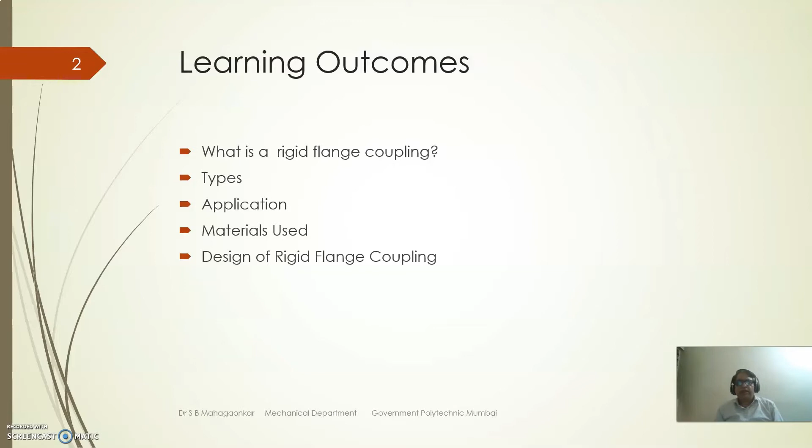The learning outcomes in this session are: first, what do you mean by rigid coupling, what are its types and applications, materials used for rigid coupling, and then the design of a rigid flange coupling.

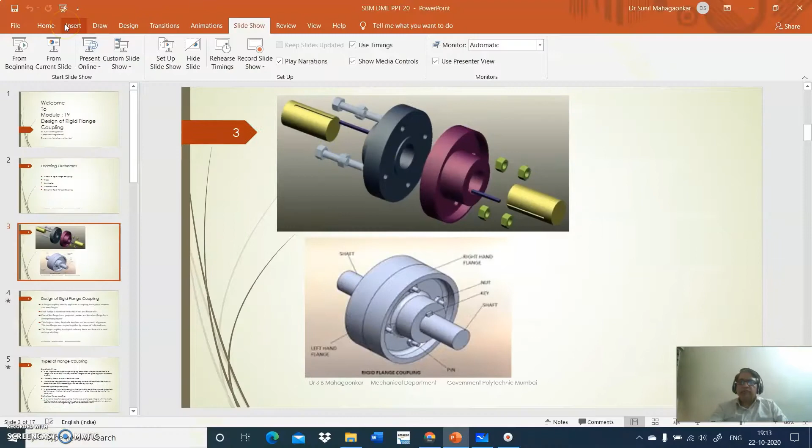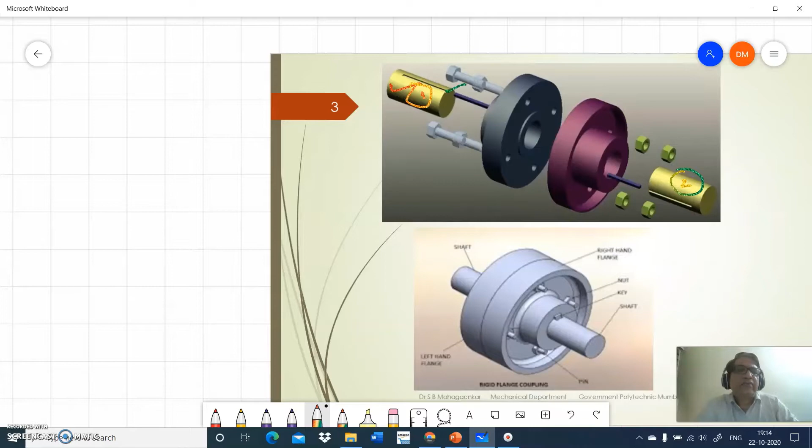The figure shown here is a protected type flange coupling. You can see it connects two shafts - this is one shaft, this is the second shaft. This shaft has got the keyway, which is at the top here. This is the keyway, and it is at an angle of 90 degrees.

If the keyway is on one shaft here, the keyway on the other shaft will be at an angle of 90 degrees. They are provided at a difference of 90 degrees for two reasons. One reason is that because of vibration, the key of one shaft may pass into the grooves of the other. The other reason is related to strength - if you provide a keyway in the shaft, it results in weakness in strength, leading to stress concentration.

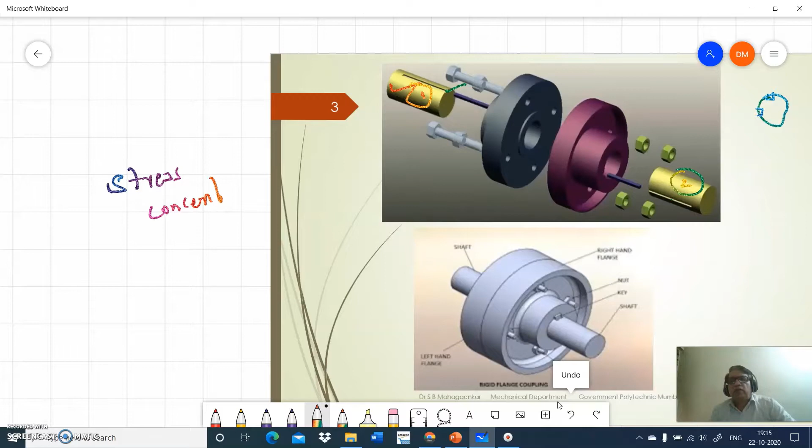If you provide some recess for the insertion of a key, the stress concentration is increased. If the length increases and it's connected in the same line, the slot will be more, causing weakness. So by taking the keyway at an angle of 90 degrees, the transmission of torque transfers from the shaft to the key, then to the left side flange, through the bolts to the right side flange, and again through the key. If the key is in the same line, it causes weakness in strength. So to reduce stress concentration and increase strength, we take a shift of 90 degrees.

So this is the flanges, and here the protection is provided. This protection is given for this flange.

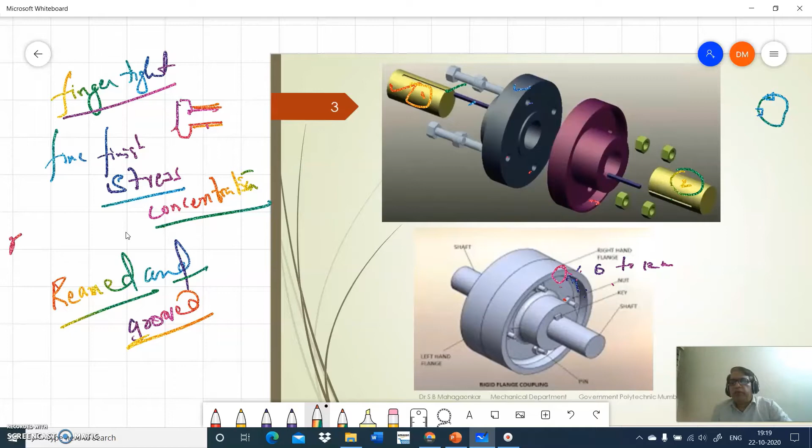then you can take the number of bolts as n, equal to whatever number you are considering, say 4. If a clearance is provided between the hole of the flange and the bolt, then we take n as the effective number, which is half of the given number. If the total number is 6 and there is a clearance, we design taking n equal to half of that, that is 3. If it is totally reamed and grooved holes, finger tight with no clearance, then we can take the number of bolts equal to the given number of bolts.

So this is the thing to apply when we are considering the number of bolts. This is a protected type flange coupling.

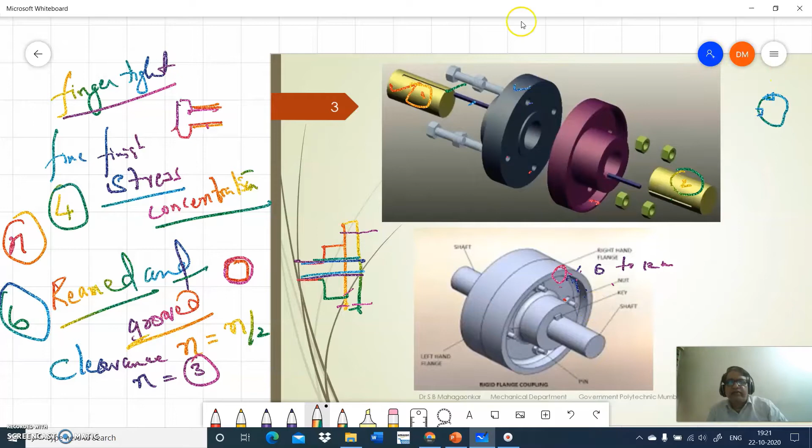In case of the unprotected type, you will simply get the two flanges, the hub portion, and the flange itself, with no protection cover. This is the shaft, it has a key, and this is the provision for the holes. So this is the left side flange, and similarly we get the right side flange. I have already shown this in another figure which I drew here.

So here you can see it. This is the left side flange, and here is the right side flange, and this is the shaft of one, this is the other shaft. This is the key. As I said, they are at an angle of 90 degrees. Why are the keys at an angle of 90 degrees? In order to accommodate the weakness in strength caused by the recess where the keyways are, so to strengthen that, we take them at an angle of 90 degrees.

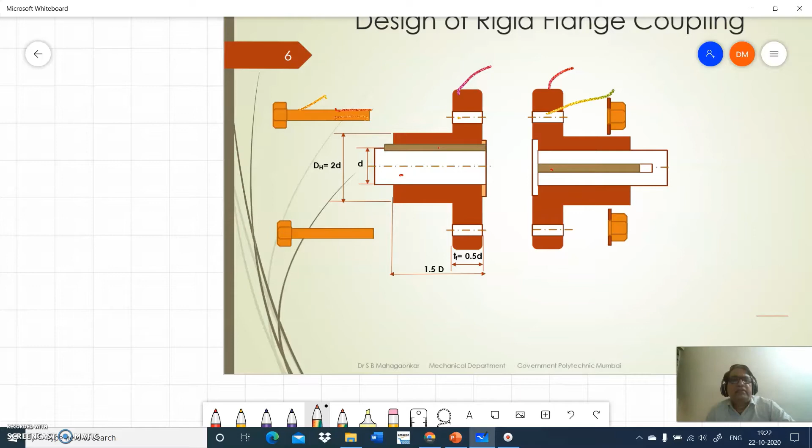These bolts have a threaded portion. Here is the threaded portion, and this is the shank portion. It goes through here, and there are no threads inside this hole. We have not provided any threads in the hole, there are no tapped holes. We have threads only on the external part.

This is a nut, you can fix it on this one. So here you will not get any movement. This bolt is totally fixed into this, and you will not get any movement between the bolt and the hole. That's why the stress which occurs here is called crushing, because the bolt is a different material and the flange is a different material.

Flange is usually made up of cast iron, and the bolt is made up of mild steel. Using this, we can get the crushing stress. You will get two different parts, which are joined with no relative movement, and that's why it's called a crushing failure. The area can be calculated from this.

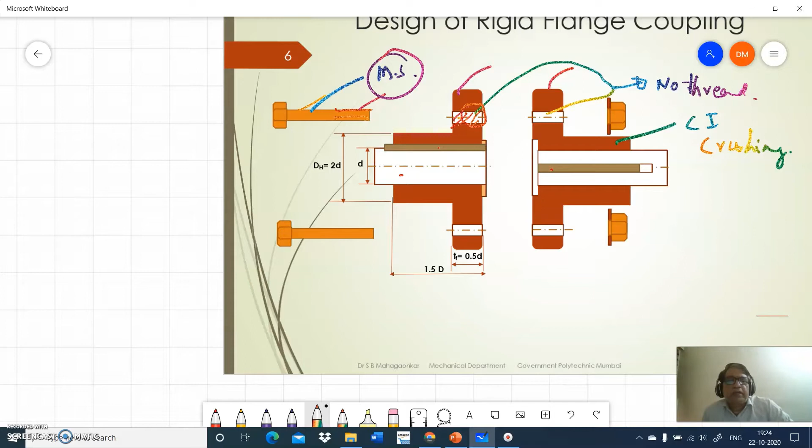While designing that, I will tell you these things. The other important part I've shown is called the spine. There is a protrusion part on the left side, like a portion that will be there, some protrusion in the... this part is the protrusion part, and this is the axis.

This is an isometric drawing, I'm drawing it so you should understand this one. This is the flange. And here the projection part is there, around 3 to 4 millimeter. This will be around 3 to 4 millimeter. If it is an unprotected type, this will be the flange, this is the flange thickness, and here you will get the holes.

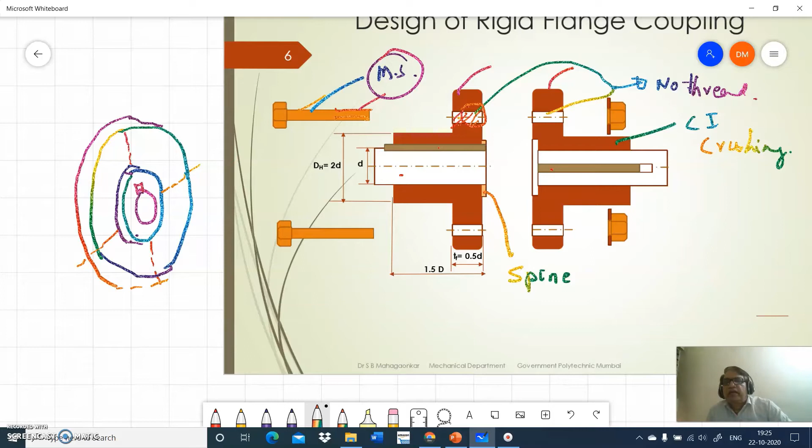If four pins are there, in that case we get this hub portion. So that will be there. This part is going to fit into this part. This is called a recess. So this spine comes in contact with this one.

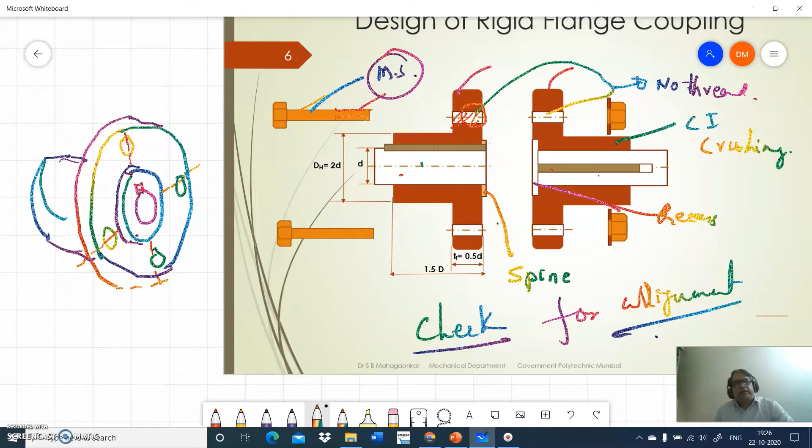So when you fix these two things, if I take one shaft over here and the other shaft over here, I can say that they are in line with each other. So we can say the alignment is proper. This is one type of check we provide for alignment, because that is very important in rigid flange coupling. In the flexible coupling, there is flexibility we are providing. This is what we are taking in the rigid coupling.

Once again, we will go over this. A rigid flange coupling usually applies where a coupling has two separate cast iron flanges. Each flange is mounted and keyed on it. One flange has a protruded portion and the other flange has a corresponding recess. This helps to bring the shaft in line and maintain alignment. The two flanges are coupled together by means of bolt and nut. The flange coupling is adopted for heavy loads and hence it is used on large shaftings.

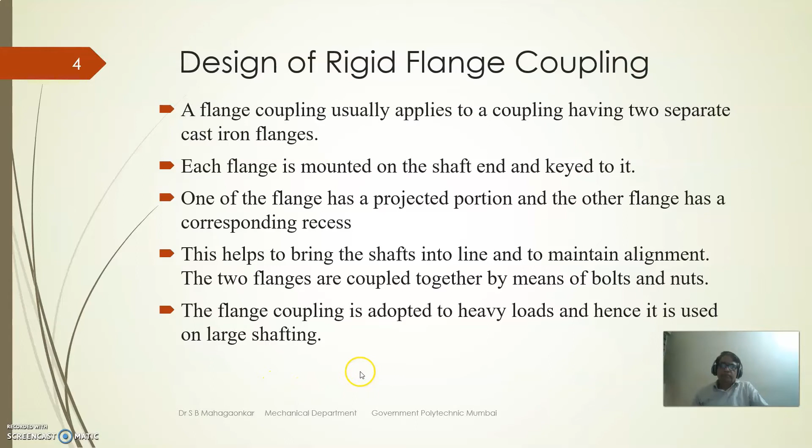There are types of flange coupling: unprotected type and protected type. In an unprotected type flange coupling, each shaft is keyed onto the boss of the flange with a countersunk key, and the flanges are coupled together by means of bolts. Generally three, four, or six bolts are used. If the diameter is less than 40, we take three; between 40 to 50, around four; and more than 50 or 60, six bolts are considered.

The keys are staggered at right angles along the circumference of the shaft in order to divide the weakening effect caused by the keyway. The left side shaft and the right side flange shaft are separated at a right angle. This is provided along the circumference of the shaft in order to divide the weakening effect caused by the keyway.

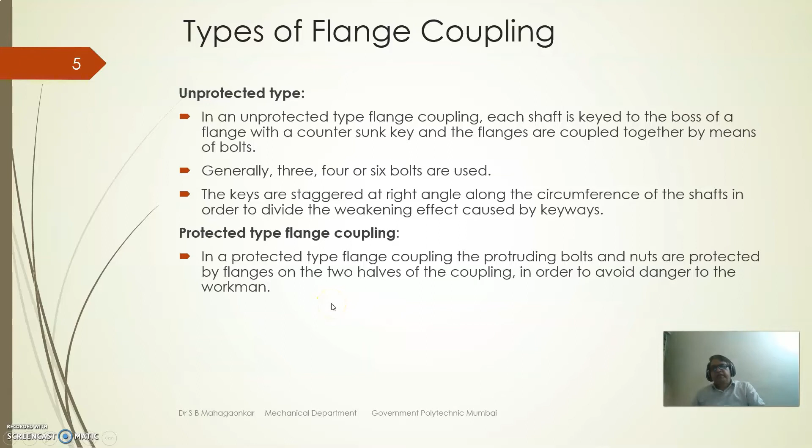The protected type flange coupling: in a protected type flange coupling, the protruding bolts and nuts are protected by means of flanges on the two halves of the coupling in order to avoid danger to the workman. This was already explained with the actual diagram of the protected and unprotected type flange coupling.

The other one is the marine type flange coupling. In the marine type flange coupling, the flange is an integral part of the shaft. The end of the shaft is forged and made into flanges with holes, and everything is there, and there's no keyway for the marine type flange coupling. So it is an integral part with the shaft.

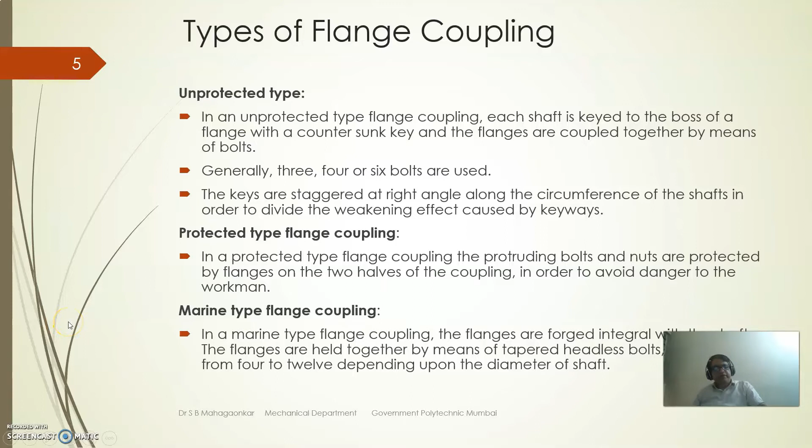The flanges are held together by means of tapered headless bolts. The bolt head is not there, but it is a taper headless bolt we are using. The numbering of 4 to 12 depends upon the diameter of the shaft, so depending upon the diameter, the number of bolts will increase or decrease.

So now we will go for just design of rigid flange coupling.

So these are the parts I have: this is the diameter of the shaft, this is the keyway on the left side, this is the keyway on the right side, and this is the spline, that is the protrusion part, also called the male plug, and this is the female. So when it is matched here, we can say that is usually 95 to 100% alignment.

We are going to get it. If D is the diameter, then the hub diameter will be twice of D, and this is called bolt circle diameter, or else it is called pitch circle diameter. It is 3 times D, and the outer diameter is 4 times the diameter of the shaft. So here the thickness of the flange is 0.5 D, and the thickness of the hub.

So this portion is called the hub portion, and this is called web or flange. This hub and web junction means this corner. Whatever you are seeing here, this is called hub and web junction.

So here when it is taken here, these are aligned, that means the alignment will be checked here. Because it is a rigid coupling, hence there must be some check for the alignment. And then we are inserting the bolt.

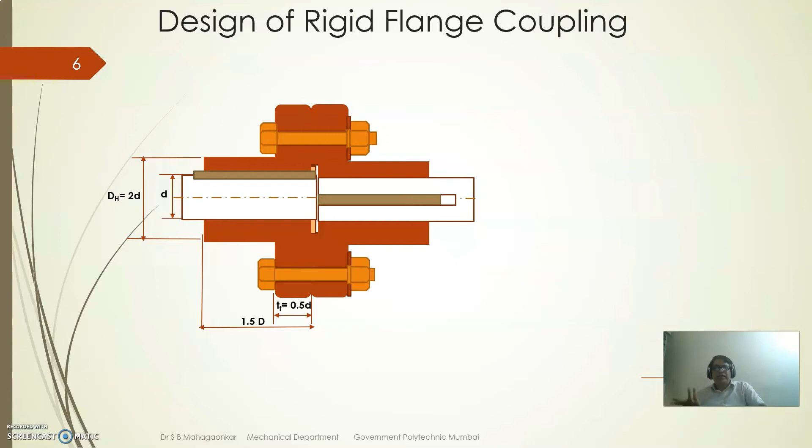Okay, so this is the design of flange coupling. So now we will go for the design of flange coupling. The first step is to find the diameter of the shaft.

So even before finding the diameter of the shaft, one must know what are the permissible stresses for the shaft. So we can take the materials: one is the shaft, this is one, and the other one is the flange.

So it is made up of cast iron. Shaft is generally made up of steel. Flange is made up of cast iron, and again the bolt, they are made up of steel or mild steel, whatever it may be. So the shaft, bolt, and key are also made up of steel.

So 4 parts are there: one is the shaft. You already know how to design the shaft with the given stress. So the first initial step is to find the allowable stress. Here the flange coupling is transmitting torque.

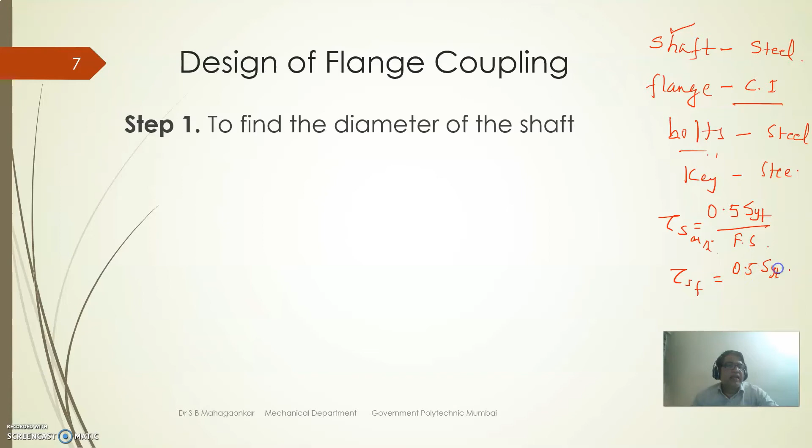So hence we have to go for tau s allowable. So tau s allowable is equal to 0.5 of SYT upon factor of safety. This is for the shaft. And if it is for the flange, I will write tau SF. It is taken again as 0.5 of SYT for the flange material divided by factor of safety.

If the flange is made up of, say, FG, that is gray cast iron of 200, and the factor of safety is say 5.

If 5 is the factor of safety, what is the allowable shear stress for the cast iron? The flange allowable shear stress is 0.5 of 200, where 200 is the ultimate strength of cast iron. Since it is cast iron, this figure indicates the ultimate strength. So 0.5 of 200 divided by 5, that means 100 divided by 5, gives us 20 Newton per mm square.

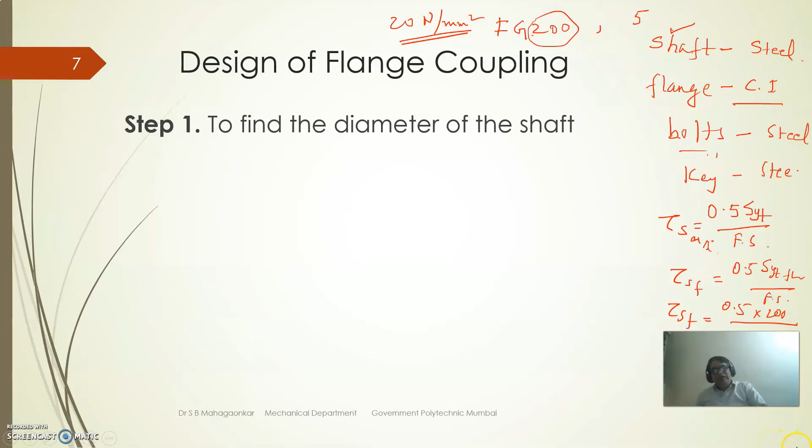So usually the value of gray cast iron, the allowable permissible limit for shear stress is 20, and for the steel key and bolt, you already know the stresses from your previous studies. Accordingly, you can determine the crushing stress in the bolt, the crushing stress of the key, and so on.

Now the first step is to find the diameter of the shaft. Tau s is equal to the allowable shear stress of the shaft. The design of the shaft is based on pure torsion only. So we have this equation, Mt is equal to P into 60 upon 2 pi N, which gives the value in Newton meter. Multiplying by 10 raised to 3 gives it in Newton mm.

Based on bending and torque, the equation for torsional shear stress is 16 into under root of Mb square plus Mt square, divided by pi d cube. Since there is no bending moment here, we can write tau max is equal to 16 Mt upon pi d cube. So d cube is equal to 16 Mt upon pi into tau s, from which I can find the diameter.

So this is the initial step, where we have to find the diameter of the shaft. That itself indicates the inner diameter of the flange. The hub diameter, the inside diameter of the hub portion, is nothing but where we are inserting a shaft, so that's the diameter of the shaft.

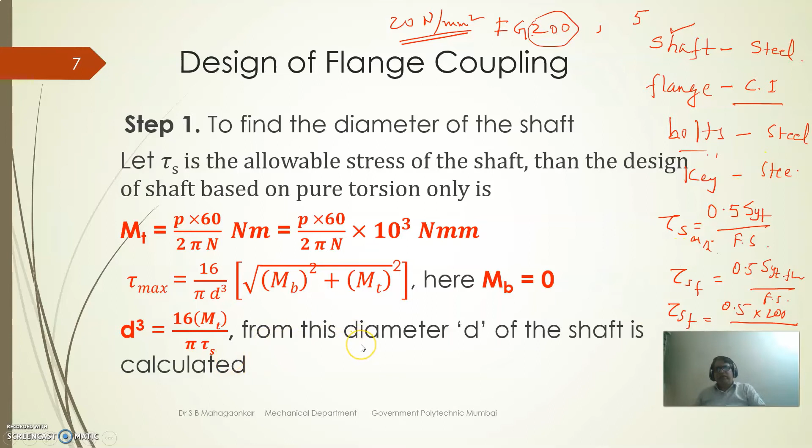That value should again be multiplied by 0.75, so you get the allowable shear stress, based on the ASME code equation. These are things we have already learnt in shaft design, so you have to apply that. This is for step 1. Is it clear to you?

Now this hub portion, we will treat it as a hollow shaft. The design of the hub is based on pure torsion, taking it as a hollow shaft, where the outer diameter is dh and inside diameter is d. So you use the equation for a hollow shaft to find dh, or put dh equal to 2d and the k value, then find tau s, which should come out less than the tau s for the flange.

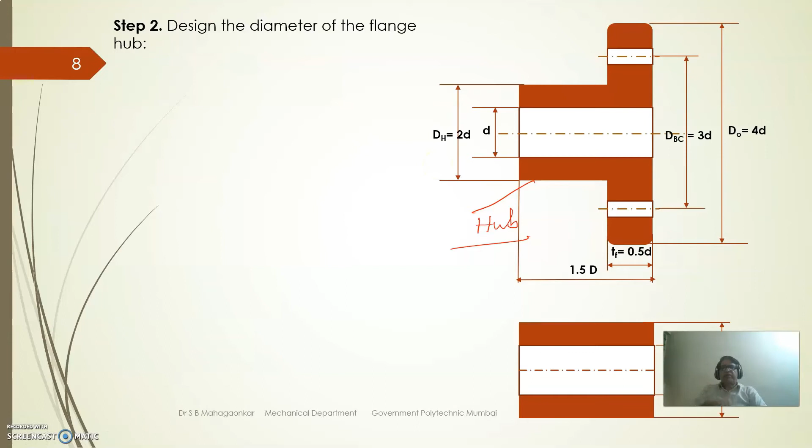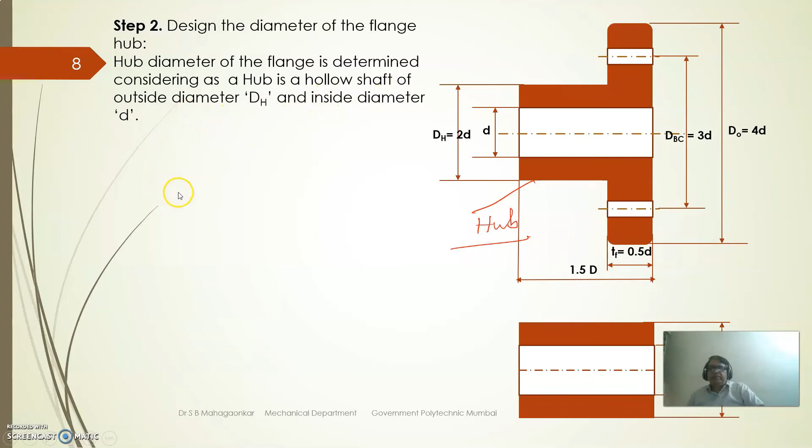So the hub diameter of the flange is determined by considering the hub as a hollow shaft, with outside diameter dh and inside diameter d, where tau sF is the allowable stress. K is equal to the ratio of inside diameter, the shaft diameter, divided by dh. Tau s equals Mt into c upon J, where c equals dh upon 2, and J is the polar moment of inertia, which is twice of I, equal to pi by 32 into dh to the 4 minus d to the 4. Taking dh to the 4 out, we can write it as pi dh to the 4 by 32 into 1 minus k to the 4.

Putting these values, I can write it for the flange: 16Mt upon pi into dh cube into (1 minus k raised to 4). Here you have to take the dh value. dh is equal to how much? It is 2d.

And k is equal to d by dh, that is nothing but 0.5. If I put that value, and you already know Mt, Mt is how we find P into 60 upon 2 pi N. Taking that value, we can find tau sf, and this is the induced stress.

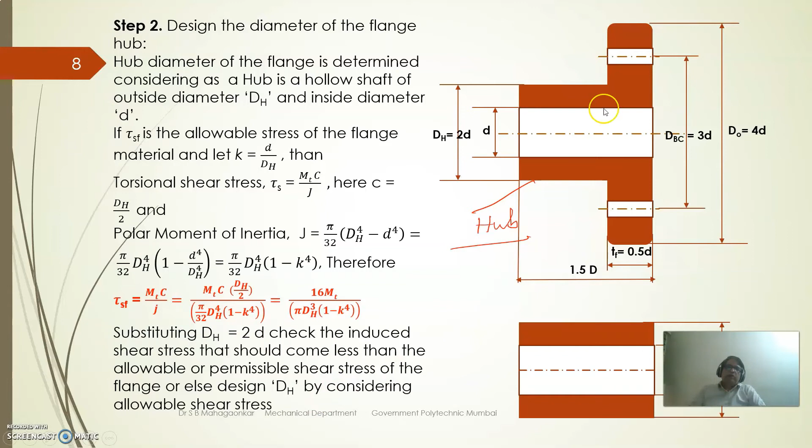It should come less than the allowable stress, or else using that value you can find dh. If it is coming more, you have to find dh by considering tau s for the flange. Say if tau s for the flange is 20, just put that value and find dh from this. So this is the way to find the hub diameter of the flange coupling.

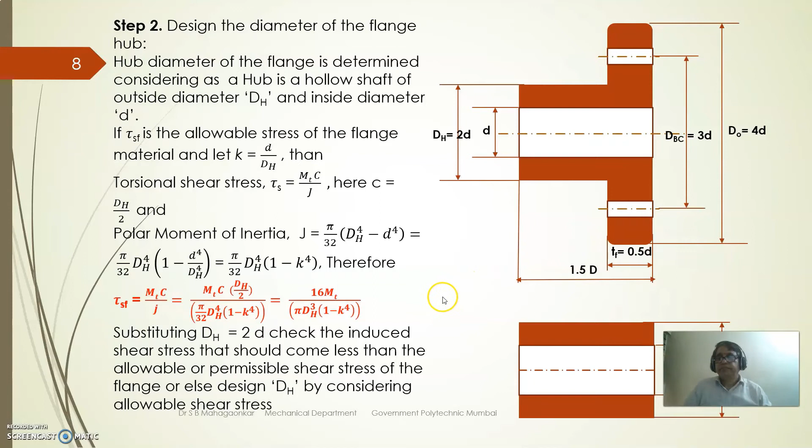So now after this we will go for step 3, the design of flange thickness. That is this thickness, Tf is equal to 0.5d. This can be designed as a shear failure at this hub and web junction. So this is the hub and this is the web.

At this part it may fail in shear. So here, if I show it, at this point you are going to get a failure in the flange. If this part, the other part is stuck somewhere, and if this is connected to the motor and it is still rotating, in that case you are going to get this failure. The flange part comes out as a ring, right?

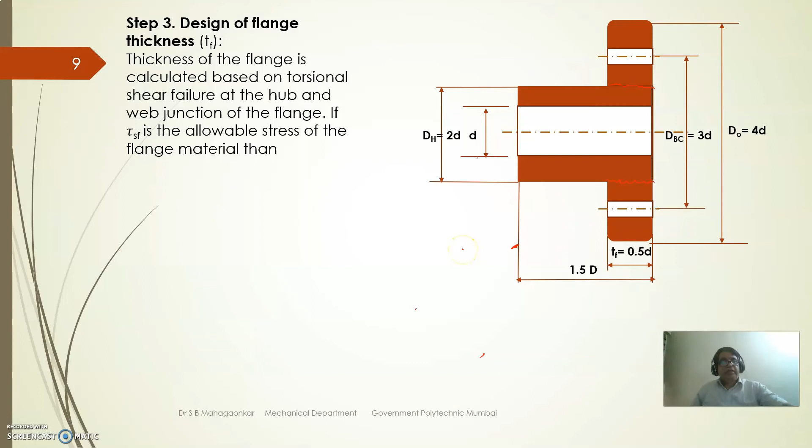The failure is at the hub and web junction. So that is the part of this, I can show it here. That is resisting strength in shear into dh upon 2.

So resisting strength in shear can be calculated with the resisting area multiplied by shear stress. So Mt is equal to pi dh, which is the circumferential length, into the thickness of the flange, into tau s for the flange, that is the resistance strength, into dh upon 2. You will get the torque, right?

Using this, I can use Tf is equal to 0.5d and dh is equal to twice of d. So we can find what is tau s for the flange. This should come less than the allowable. Otherwise, take this tau s value as 20 or 15, whatever is given, and find Tf based on that.

So this is the ultimate. You have to find Tf based on shear stress value, or else substitute the proportional factors and find the induced stress, right? That should come less than the allowable stress.

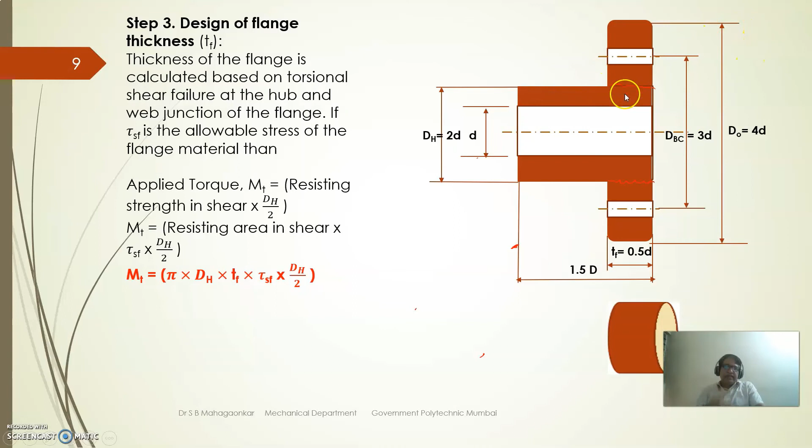So here this is the area. As I said, if dh is the diameter here, and this is the thickness, you are going to get pi dh into the thickness Tf as the area. This comes out as a ring, right? So this resisting area is pi dh into Tf.

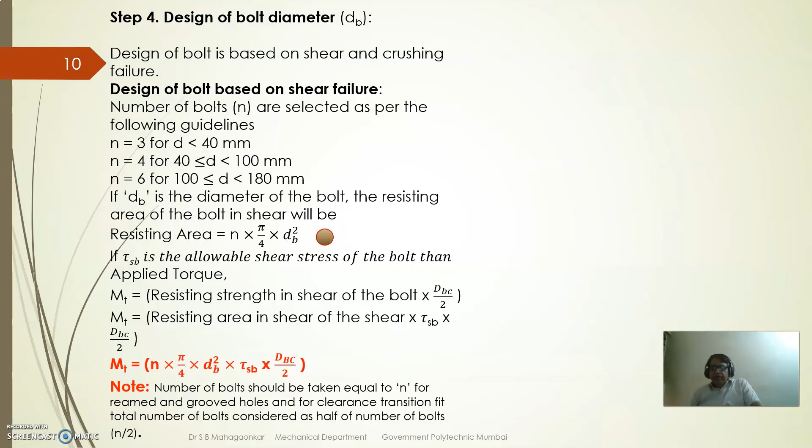So that will fail. There are two failures you are going to get. One is a shear failure. Suppose this part, the other part which is connected to a certain gearbox, let's say - if that gearbox is stuck or jammed, and this is in running condition, ultimately if a bolt is weaker, in that case you will get a shear failure of the bolt, right?

If 4 bolts are there, you get 4 areas. If 6 bolts are there, 6 areas. So shear area in the bolt you will get.

That's the failure of the shear in the bolt. Or the other one is, since the bolt is in contact with the flange, as I said, the contact stresses will be there.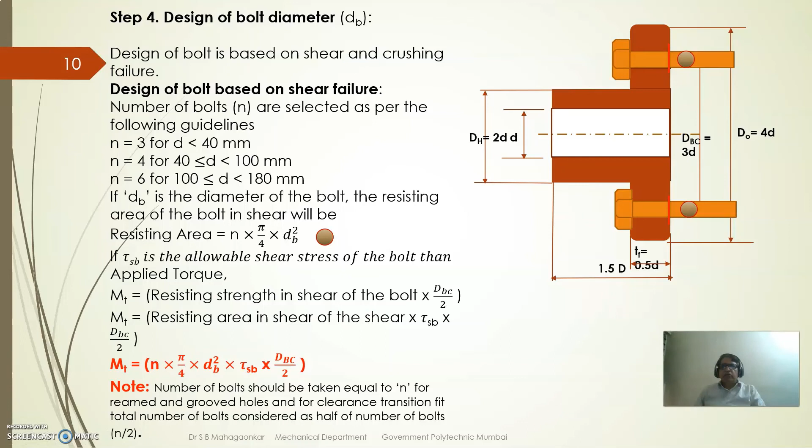So this is about the design of the bolt based on shear. Now we will go for the design of the bolt based on crushing. As said, the crushing stress - where is that area you will get?

This is the area - TF multiplied by dB. So here, this spot, this is the area you are going to get. This is the projected area. Projected area into the number of bolts gives the total resisting area in crushing.

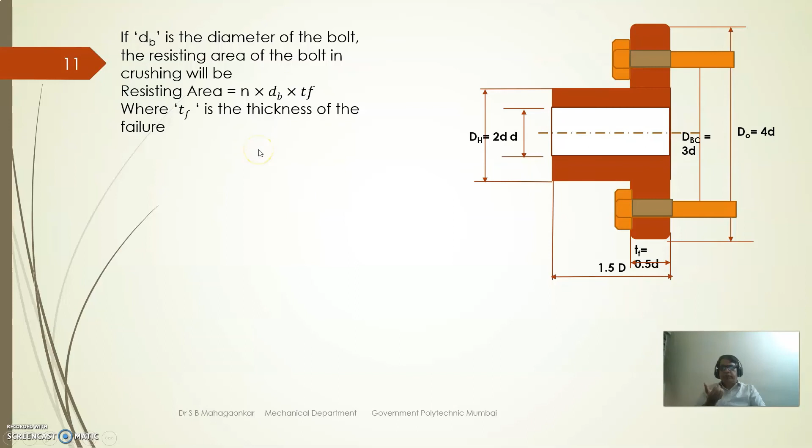If TF is the thickness and dB is the diameter of the bolt - we already know these things, just put them here. So Mt is equal to n into dB into TF into sigma CR into dBC upon 2. Just put in the values, and after that you can find the thickness of the flange.

If you are putting sigma CR equal to the allowable stress, you can find TF, or else just put the proportionate values. dB you just calculate. So that value I have to take based on shear, and then TF is equal to 0.5D, you can take it here and find the sigma CR, and this should come less than the permissible stress for the bolt material.

If the induced stress is coming more than the permissible, find out dB based on crushing. TF you don't find, TF you use as it is, you find dB. Just put the value of sigma CR. Let us say for steel it will be around 70 or 80. Put that value here and find the dB based on that.

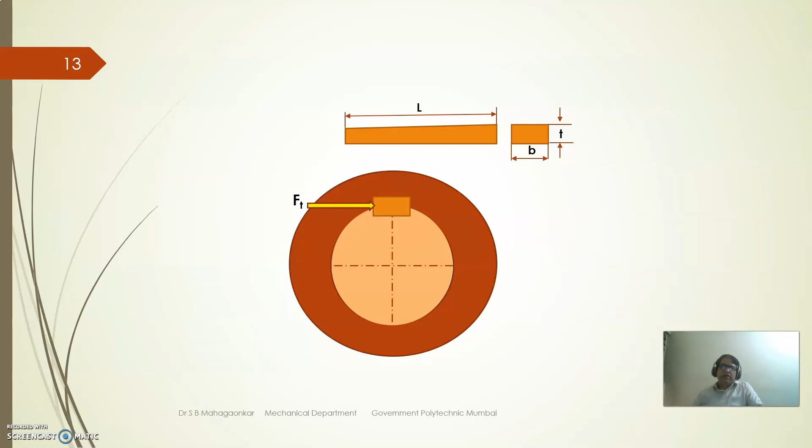So here the area, you can see this is where you are going to get a failure. Half portion will be retained in the shaft and half portion will be retained in the hub in direct shear. So here L is equal to 1.5D, you can take, B is equal to D by 4. By taking that we can find MT based on this shear. So this is how we are going to get a failure in shear, and that is the area.

As shown here, this area is retained in the shaft and this part is retained in the hub portion. So B into L into tau S for the key, you just put the values here, find tau S, that should come less than the allowable. If it is not coming, find B from this. L is equal to 1.5D, as it is, you take it, and find B based on tau S value, tau S for the key.

Similarly, design of key based on crushing. As you know, crushing failure, it is again force subjected here. So this force will be in contact. The part which I have shown here, this point, this is the surface, it is in contact. So here this area will be in contact, this length will be L and the thickness will be T by 2.

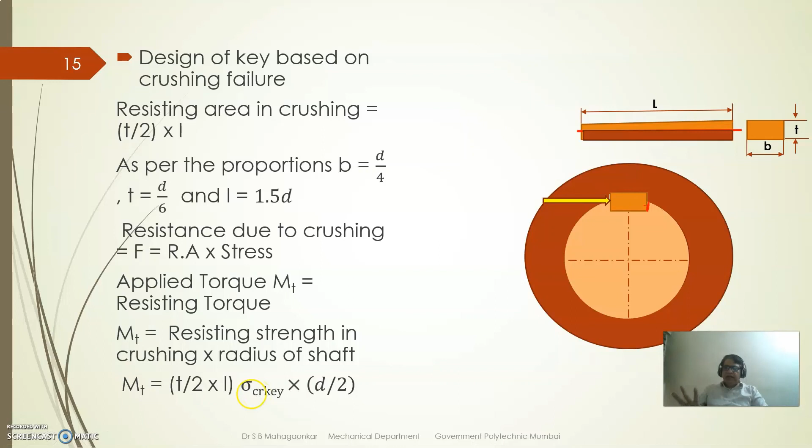T by 2 into L is the resisting area in crushing, and B is equal to D by 4, T is equal to D by 6. Taking that value you can find MT, that is sigma crushing you can find out, and that should come less than the allowable crushing. If it is coming less than allowable, it's okay. Otherwise find T based on crushing, put the value of crushing 70 or 80 and find the thickness. So this is the design of key based on crushing.

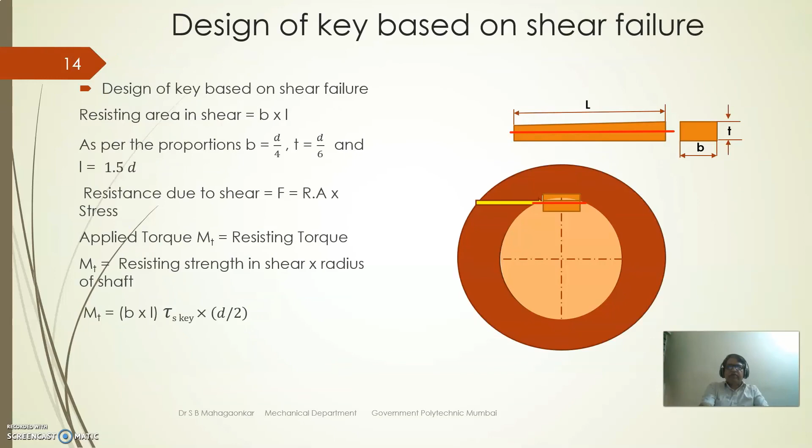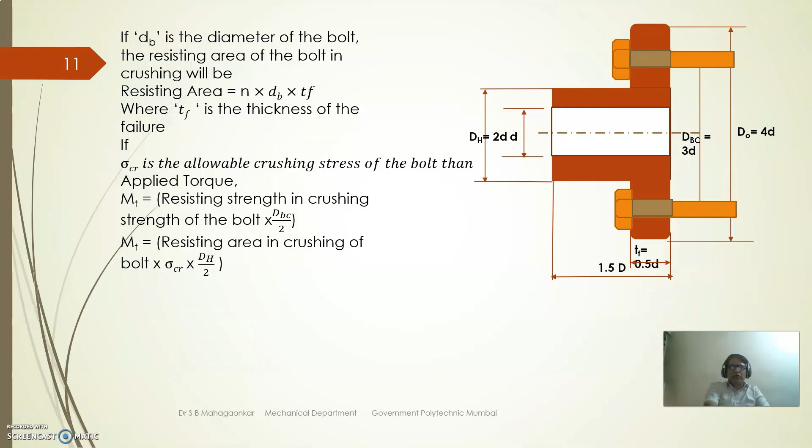The other part which is there for the flanges and all, as shown here, this diameter d naught, which is equal to 4 times d, since already we have checked for dh, it is checked for the torsional shear stress. Since this diameter dbc or d naught is equal to 4 times d is more than dh, the induced shear stress value will definitely come less than that. So there's no need of checking shear failure for this one, we can take that as proportions. So for protected type flange coupling, you can just take the proportions, there is no need of designing the protection part.

Finally, the conclusion: we enhance the life of the machine component. Discussions are made on the design of rigid flange coupling. Since it is possible to have a perfect alignment between two joining shafts, this coupling is used for medium speed rotating shafts transmitting high torque. So this is about the rigid flange coupling.